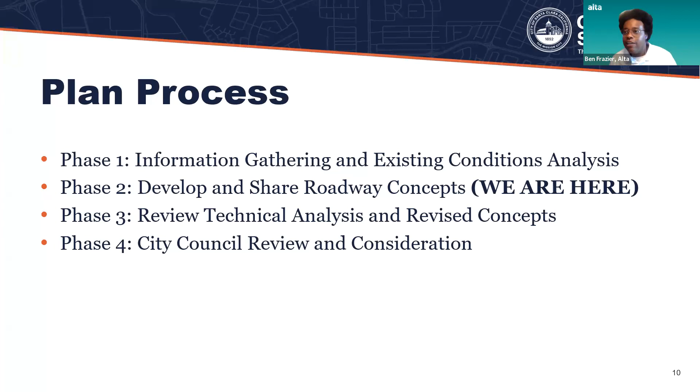In phase 2, which is where we are right now, we're developing roadway concepts and sharing them with you, the community, to get your feedback. The next phase is reviewing technical analysis and the revised concepts. So with the data we collected in the first phase, we'll model the impacts of the different concepts, and then share the results of those technical analyses with you in the next phase. In the last phase, the plan will go to City Council for their review and consideration.

So this is another view of that schedule. We're right in the middle now, in the second phase of community workshops. This is the fourth workshop for the Benton Street corridor, and we'll have another two workshops in the third phase, where we share the revised concepts and all the analysis data back with you. That will likely happen a little later this year, in a couple of months, so stay tuned for that. Okay, now let's dive into project overview and updates.

As a quick review of the project area, it is Benton Street between Dunford Way to the west and Lincoln Street to the east. It's a very long corridor that predominantly has two different widths: a 64-foot wider section to the west, and a 38-foot narrower section to the east.

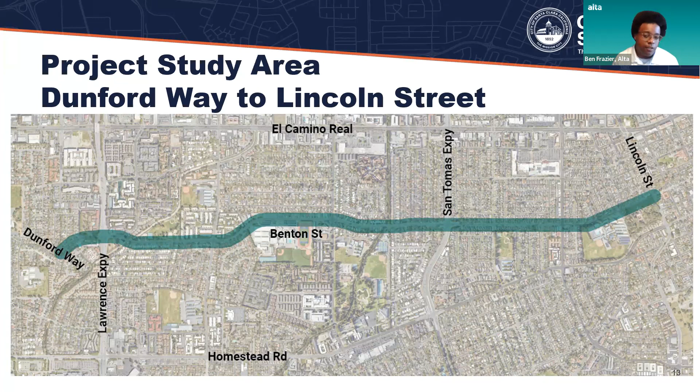This is broken down again here. Between Dunford Way and Maryann, that's a 1.8-mile east-west segment that is 4 to 5 lanes, with a posted speed limit of 25 to 30 miles an hour, typically 64 feet wide. Then from Maryann Drive to Lincoln Street, this is the narrower eastern segment. It's 0.8 miles long, 1 lane in each direction, with a posted speed limit of 25 miles an hour.

And along the entire stretch of the corridor, the land uses are primarily residential.

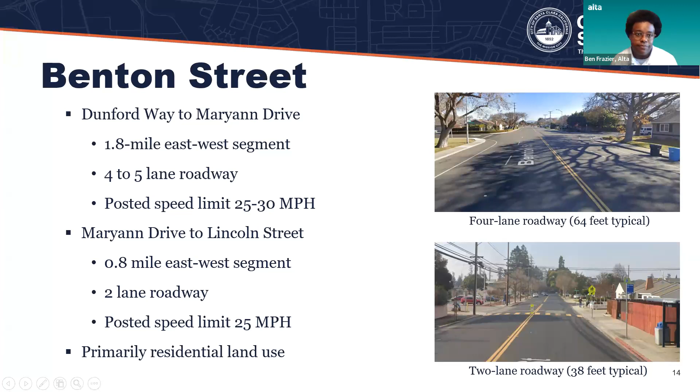So what have we done so far? In the first round of community engagement, we held two virtual workshops similar to the one you're attending now, one on a weeknight and one on a Saturday morning. We had one pop-up event synced up with Bike to Work Day, where we had an event at the San Tomas Aquino Creek Trail. We tabled near the Agnew trailhead and gathered feedback from riders as they passed by. We were also there with an Energizer station to give riders little snacks and things as they rode by.

We also had an online community survey with over 100 responses from various community members, asking how they use the corridor and about their vision and goals for its future. We also had existing conditions and data collection that involved a site visit, where we walked chunks of the corridor. We saw an afternoon dismissal of the high school to see how that deals with the corridor. We collected traffic counts and travel time data throughout the entire corridor.

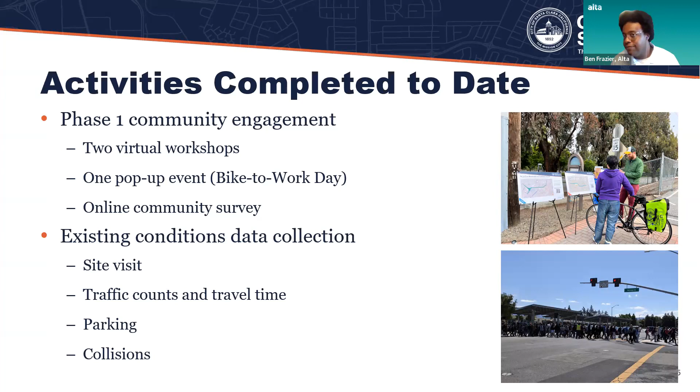And so what were those top themes that we heard from the community engagement?

Community members want safe, comfortable bicycle facilities that they will want to use and feel comfortable using, that don't feel scary because they're too close to cars or fast-moving vehicles. Improved bicycle crossings - a lot of other bicycle routes in Santa Clara cross the corridor, including the San Tomas Creek Trail, and we heard from a lot of users that it's a very uncomfortable and stressful crossing for them. That was one of the most popular crossings we've heard about through all of our community engagement phases.

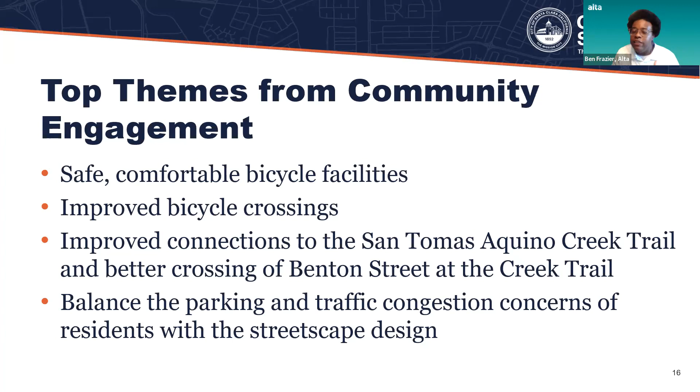And lastly, the need to balance the parking and traffic congestion concerns of residents with streetscape design. That's something we'll get into a little later as we talk about the concepts - what are the community preferences, and what the trade-off is to get these more comfortable bicycle facilities.

Now I want to dive a little deeper into the corridor collision and parking analysis to give you some insights into the existing conditions data we collected. In terms of collisions on Benton Street, we studied data from 2017 to 2022. Along the entire stretch of the corridor, there were 102 collisions involving motor vehicles, 16 collisions involving people biking, and 4 collisions involving people walking.

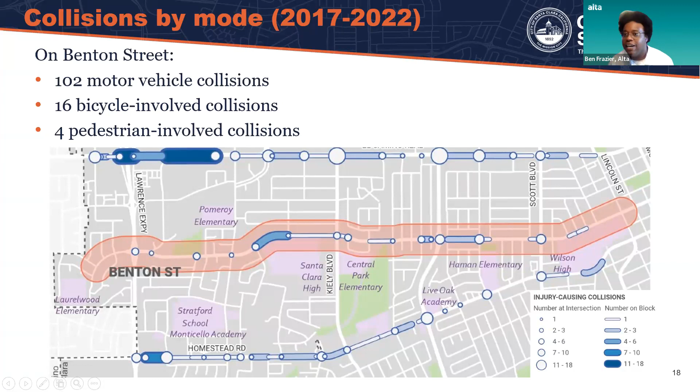This graphic shows where the collisions occurred along the corridor. You see a concentration along the western side of Santa Clara High, and a little more east of San Tomas as well. We also have some context on neighboring corridors to the north and south, but these numbers are only for Benton Street.

A little more info on the collision analysis: there were no fatal collisions along the corridor, luckily, but 2 of the bicycle collisions did involve severe injuries. Of all the collisions along the corridor, 33 of them had vehicle speeding noted as part of the cause.

A couple other highlights: vehicle unsafe speed was the top factor, and auto right-of-way violations were the second top factor. This graph on the left shows how often collisions occurred at various times throughout the day. You see a higher peak in the afternoon, both during the PM rush hour and a bit earlier around school dismissal time, and another spike in the morning around the AM peak.

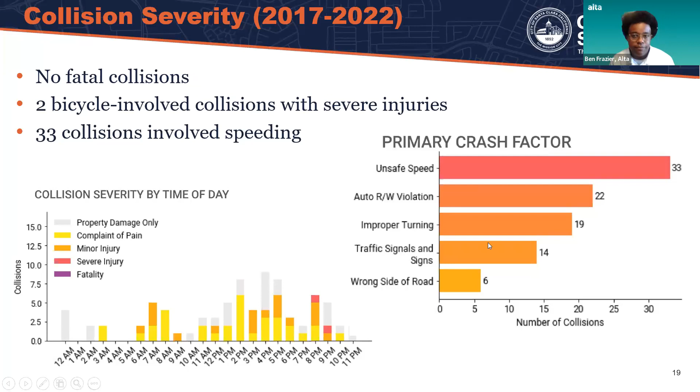In terms of the parking data, we collected it during the last week of April earlier this year, on Tuesday, Wednesday, Thursday, and Saturday. We counted the number of cars parked on Benton Street and within 500 feet of every cross street during peak periods: 7 to 9 a.m., 11 to 2, and 11 p.m. to 2 a.m., counting every half hour during those times.

Here's what those results average out to. On the north side of Benton, there are 313 parking spaces available, and on average only 94 of them are used, a 30% utilization rate. On the south side of the street, there are 273 parking spaces available, with an average of 62 used, a 23% utilization rate.

If we average that overall across the corridor, there's a total of 586 spaces with 156 on average used, a 27% average utilization rate. We also looked at the side streets, and across all of them along the corridor there are over 1,200 spaces, 1,216, with an average of 372 used, a 29% utilization rate.

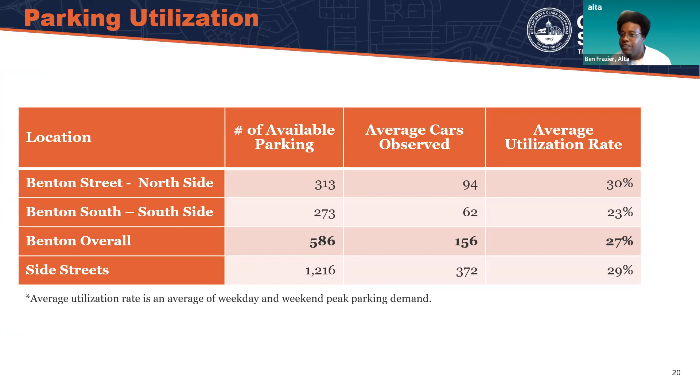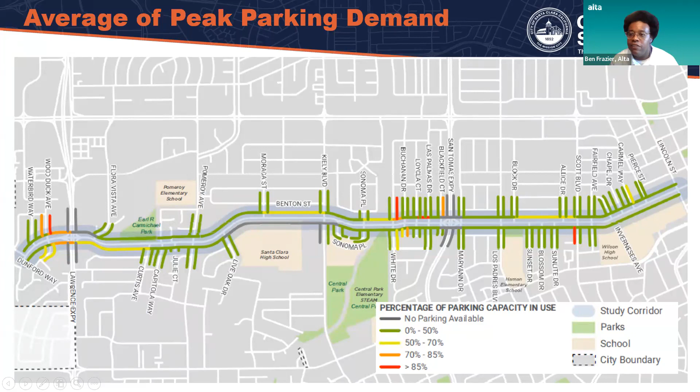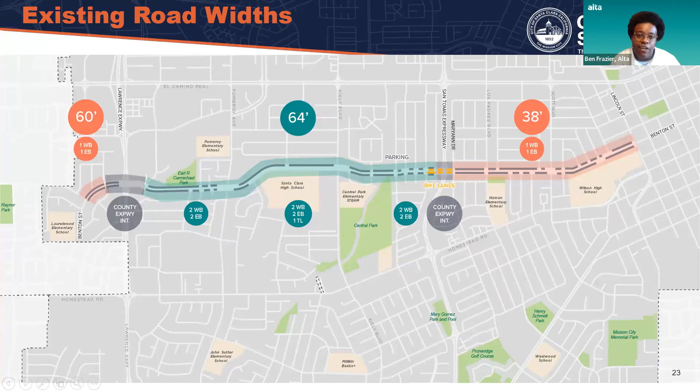Now it's time to dive into the corridor concepts and what the potential alternatives are to get better, safer, more comfortable bicycle facilities on Benton Street. As a quick reminder, the corridor changes width a couple times throughout its length. Predominantly it's broken into 64 and 38 foot wide sections, with a couple of different cross sections thrown in, including a 60-foot cross section at the very western end.

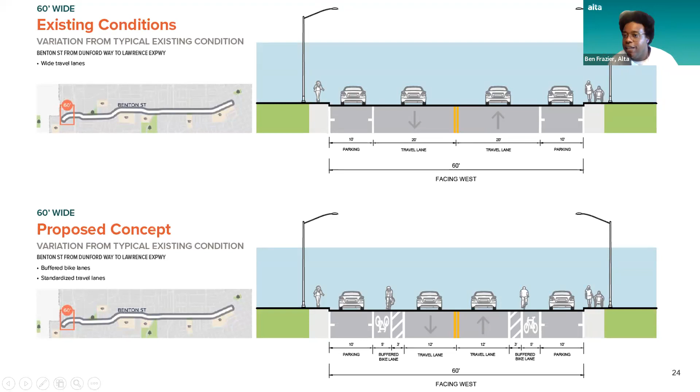Speaking of that 60-foot cross section, here's a quick cross section to show you. Right now that's 1 lane in each direction, 2 very wide lanes, about 20 feet each. So in order to accommodate buffered bike lanes here, no trade-off is needed — we just need to shrink those 2 lanes down, which allows us to get 5-foot bike lanes with 3-foot buffers fairly easily, with no trade-off needed in that section.

Now moving on to the heart of it, the main 64-foot wide section. This is what that section of the corridor looks like right now. Let me see if I can get my magnifying glass to work.

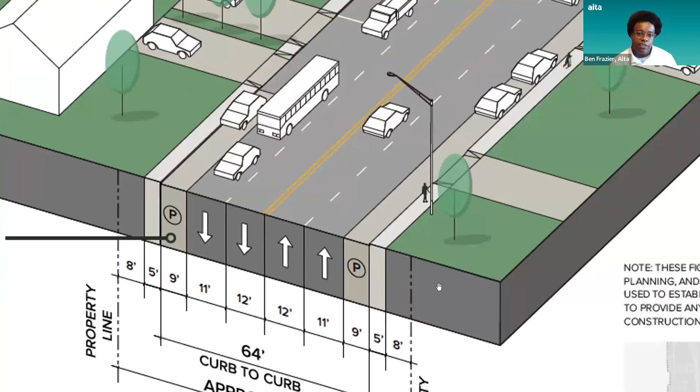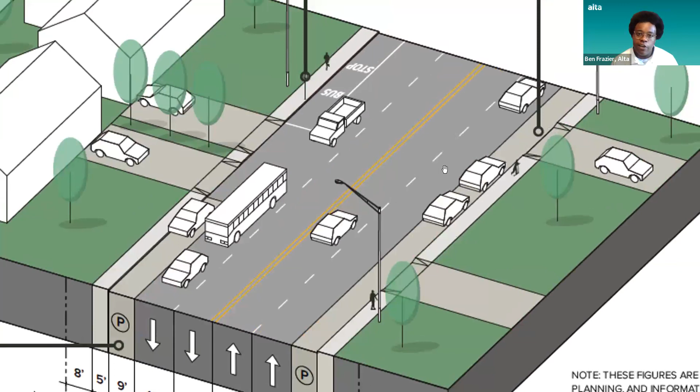Right now, that section of the corridor is 2 lanes in each direction. The interior lanes are 12 feet and the outer lanes are 11 feet. They also have 9-foot parking lanes on each side, and right now there are no bicycle facilities on the corridor. So this is what that existing 64-foot section looks like.

I would like to introduce the first concept. This first concept would add buffered bike lanes by reducing a travel lane and retaining parking. Let me get my magnifying glass working again.

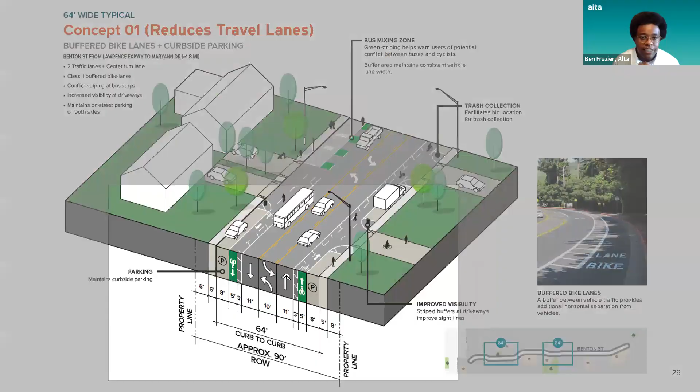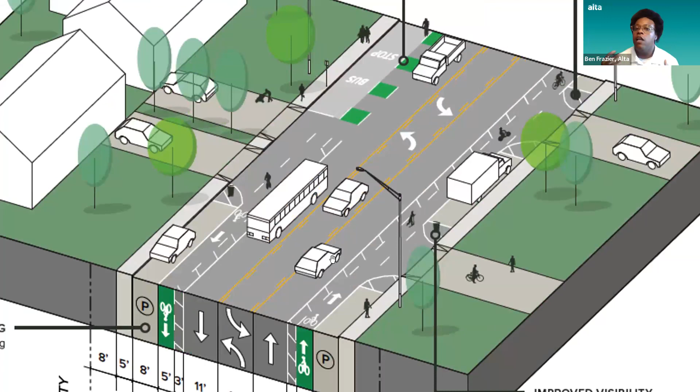In this particular example, we lose one of those travel lanes and keep 1 lane in each direction, and we gain a 2-way center turn lane. The 2-way center turn lane can provide a lot of benefits to the corridor, including safety benefits.

It can reduce the multiple point threat collision. For example, if you were trying to turn into this driveway right now, you just have to stop in that travel lane and wait for a gap. But with the 2-way center turn lane, you can pull out of the through lane, and then you can easily wait for that gap in the opposite direction, and you're able to pull in.

Similarly, if you're pulling out and trying to get to the other side, you only have to fight one direction of travel, and then you can wait for the other side to clear for you to join.

This particular design, because it retains parking, would include buffers around each driveway, as you can see here, to increase visibility, to make it easier for you to get in and out, and to make sure you can see people biking, going to and from. These buffers would also provide a space for you to leave your trash cans and other waste receptacles outside of the bike lane and outside of the parking area, in a place that doesn't obscure visibility too much.

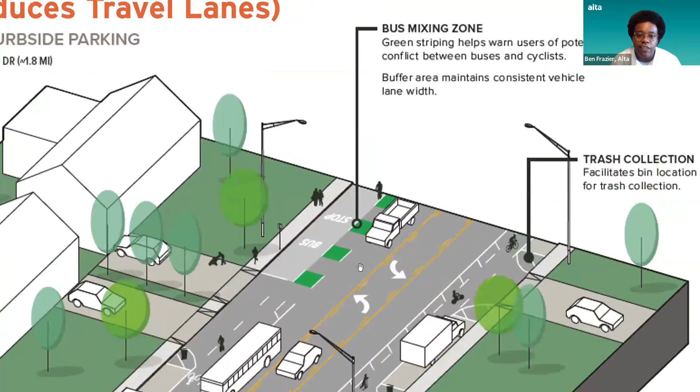This area, where there are bus lanes, would also include conflict markings, so that everybody is clear, and that there is a mixing zone here for the bus pulling away from the curb.

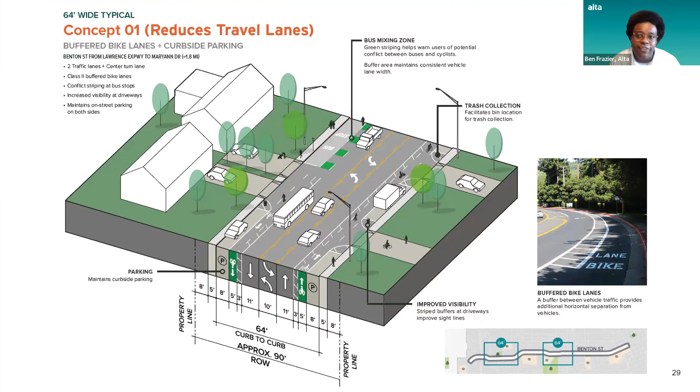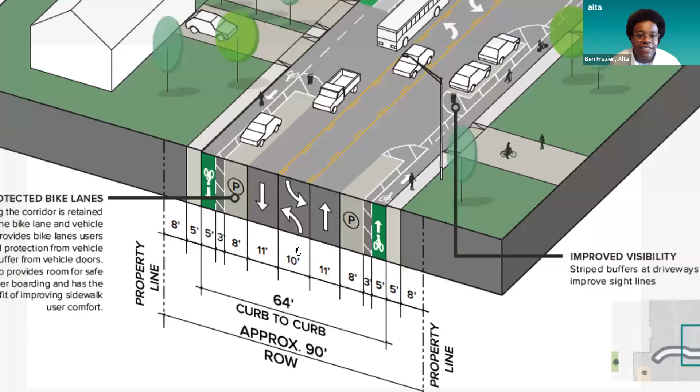Now moving on to the second concept, concept two. This concept would also remove one travel lane, but we would reconfigure the bike lane and the parking to provide parking-protected bike lanes. In this example, we have that same travel lane trade-off, keeping one lane in each direction and the two-way center turn lane.

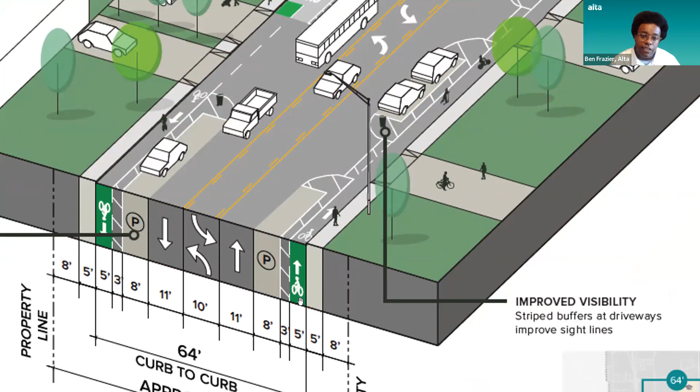What's different here is we've swapped the parking and the bike lane, so that now the bike lane is along the curb and the parking is floating out, with a 3-foot buffer between the bike lane and the parking. This provides a safer option for people bicycling away from traffic, physically separated from travel lanes. That provides a safer, more comfortable option that may encourage additional people to bike, and will make those who are biking now likely feel much more comfortable and safer doing so.

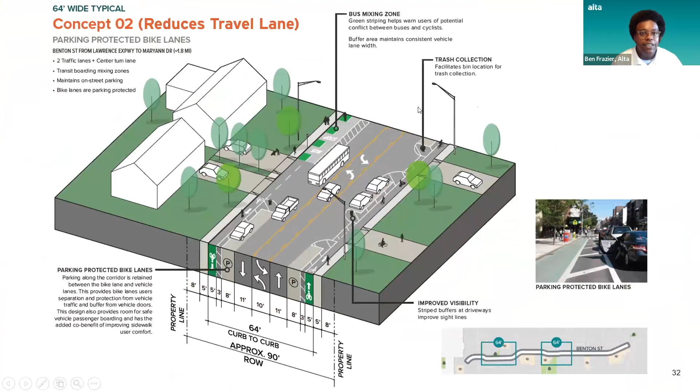Similarly to the other option, we will have buffers around the driveways to keep visibility, which can also serve the trash can purpose and all those other great benefits. Similarly with the bus stop, we would have similar conflict markings where the bus pulls from the curb, but again, the bike lane would be against the curb in this particular example. So this is concept two, parking-protected bike lanes.

Our third concept for the 64-foot section would remove parking on one side of the street but retain all 4 travel lanes. In this example, we keep all 4 travel lanes as currently exist. The widths do change a little bit, but we are able to get buffered bike lanes on both sides with a 2-foot buffer.

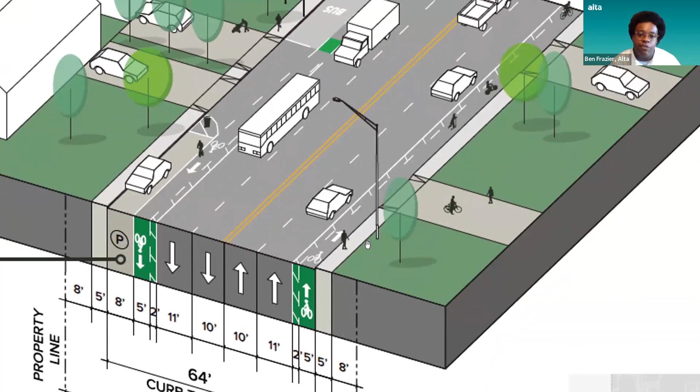So this buffer is a little bit narrower than the other buffer you see in the first 2 concepts, that's 3 feet. And then parking is retained on one side of the street. Which side that's on has not been determined, and that will be determined in a later design stage, not part of this particular study. Parking would be retained only on one side of the street in this example, but all 4 travel lanes would also be retained for buffered bike lanes. So those are the 3 main concepts for the 64-foot wide section of Benton.

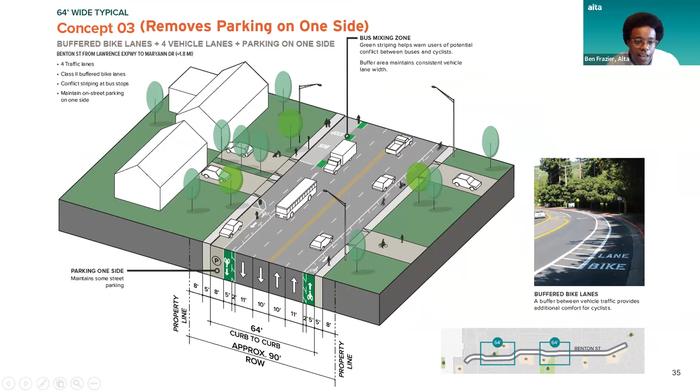The other item we wanted to talk about when it comes to Benton is we wanted to pay particular attention to the area in front of the high school. We've heard a lot of attention from students in the school community that a lot of students bike to and from the high school, and we want to make sure they're comfortable and safe doing so.

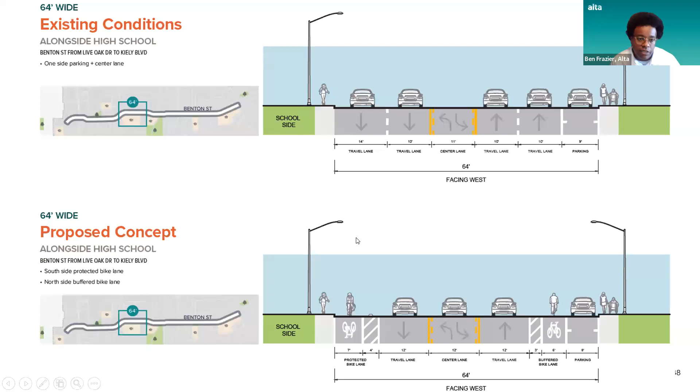So we have an additional concept that we want to propose directly in front of the high school that would include protected bike lanes. You can see the little curb stop here, and what that physical device actually is has not been determined as part of the study - that'll come later in a design phase if this is the chosen option. But we do want to add specific protection in front of the high school on the school side to give those students extra protection and safety as they travel to and from campus.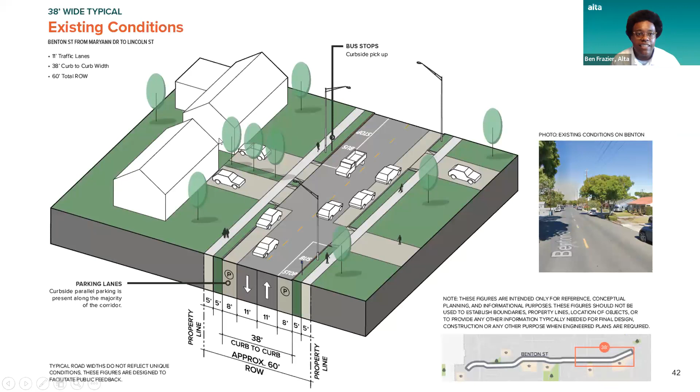Concept 1 would retain both travel lanes and all the parking, but would turn the street into a bicycle boulevard. A bicycle boulevard is a street that prioritizes bicycle travel by including traffic calming measures to slow down vehicles. There's a whole suite of tools the city can use to implement traffic calming, including things like speed bumps, chicanes, traffic circles, or other measures that can be used individually or in combination, and it's very context dependent on the exact behaviors you're trying to calm. The goal is to make bicycle travel on this lower volume, slower speed street comfortable without dedicated space. What those exact traffic calming devices are, if this is the chosen option, will be determined in a later design phase when the city digs deeper into the exact needs.

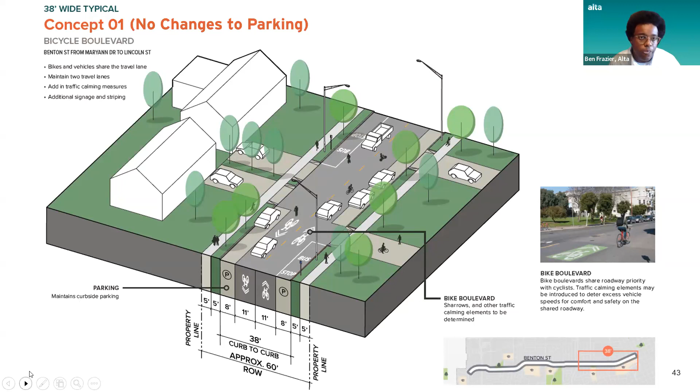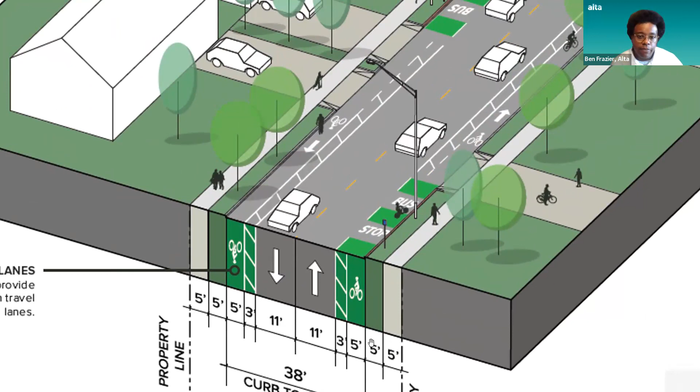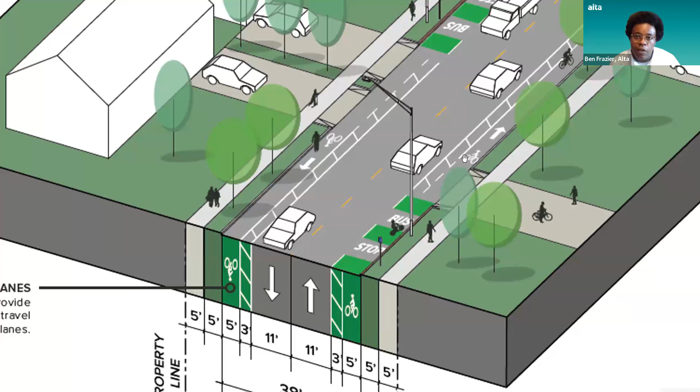The second concept would add buffered bike lanes, but would remove parking on both sides. In this example, both 11-foot travel lanes are retained, but parking is removed on both sides. Instead, you get a 5-foot bike lane with a 3-foot buffer on both sides. This provides a dedicated space for people biking with a nice buffer away from moving traffic that is 3 feet wide.

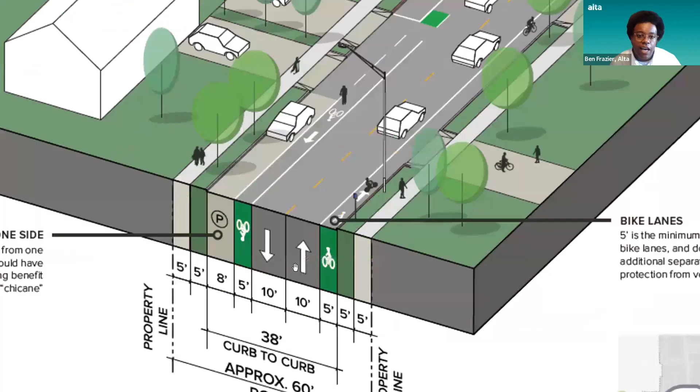Our third option for this corridor would retain parking on one side of the street and would provide standard 5-foot bike lanes. So in this case we still have both travel lanes, 10 feet, and then on one side parking would be retained. Similar to the 64-foot section, which side of the street that parking would be retained on is not being determined as part of the study, and that would be determined a little bit later on.

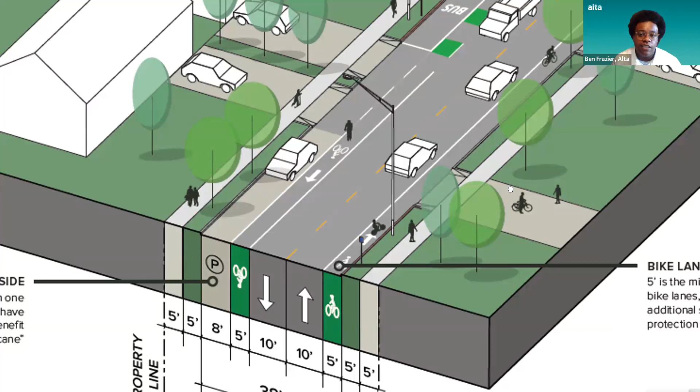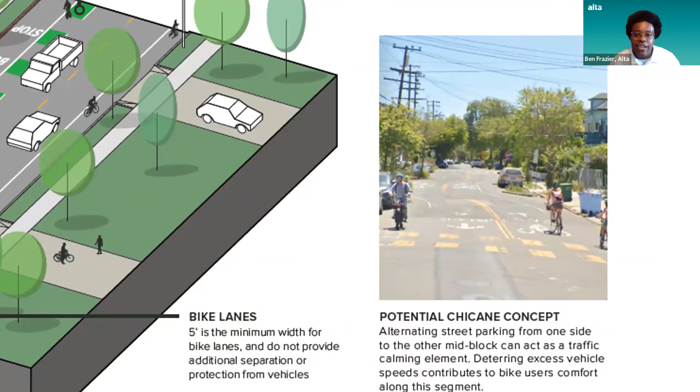Alternatively, this design could allow for parking to be alternated on either side, which could allow for a bit of a chicane concept to wiggle your way through the street, which is another way to slow traffic down because you're not going in a straight line. Almost instinctively when you're driving, you're going to slow down to take those curves at a more comfortable speed. So retain parking on one side and then 5-foot bike lanes, but there's no buffer on either side of the bike lane - you just have the 5 feet there.

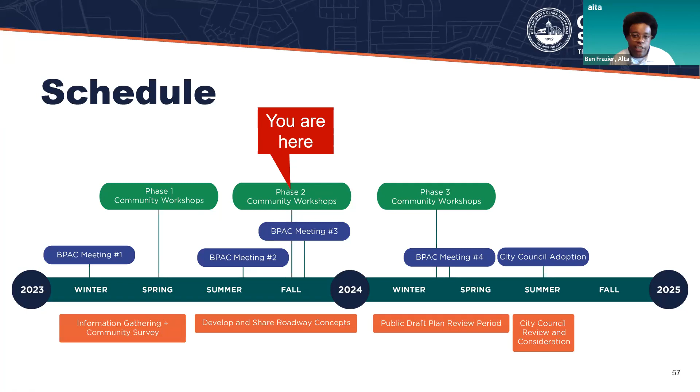And so once again, here's the quick overview of the project schedule. We're kind of right smack dab in the middle. We'll come back with that data analysis with each of the different concepts in the next few months. So stay tuned for this phase 3 of community workshops. And we'll be back to the city's BPAC in January, presenting the reports as well.